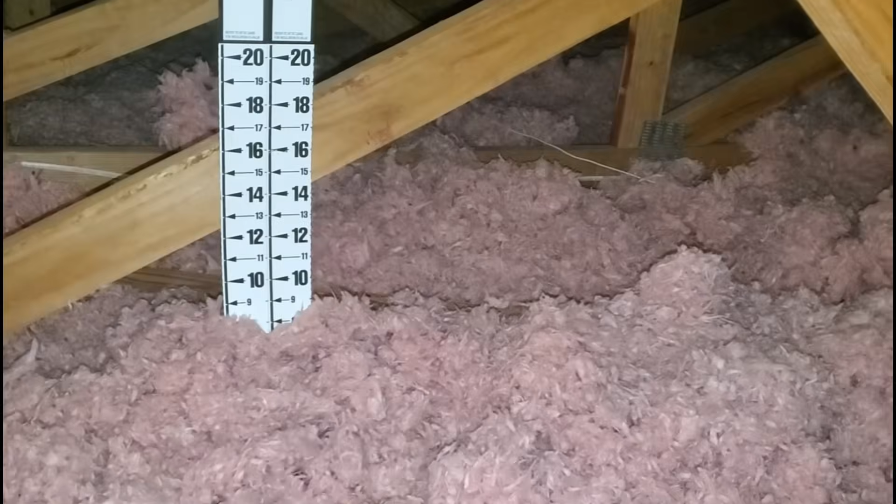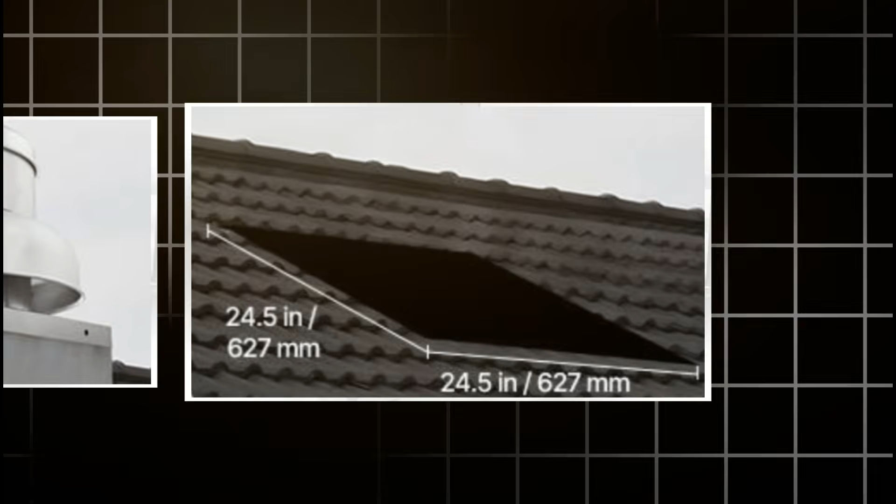Right in the middle of July, your attic is basically an oven. The temperature up there can easily hit 150 degrees Fahrenheit, slowly baking your house from the top down and forcing your AC unit to work in overdrive. The modern solution the industry wants you to believe in? Paying an electrician $500, cutting holes in your roof, and wiring up attic fans that just add to your monthly

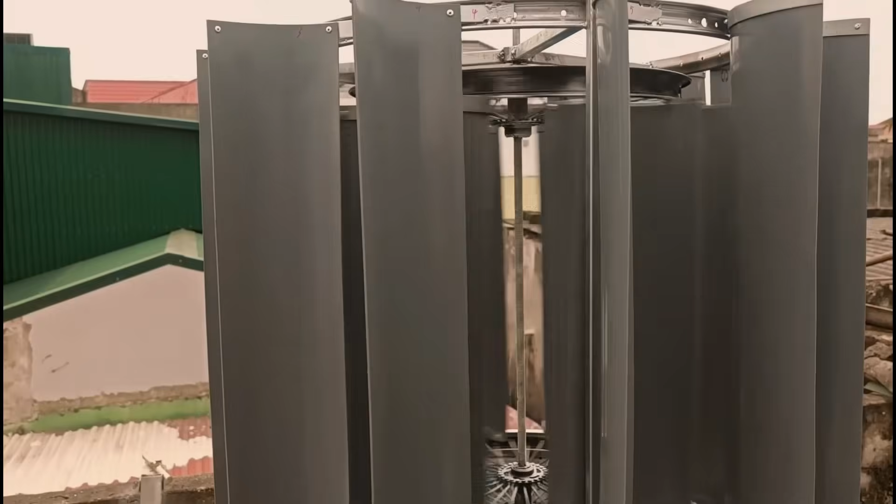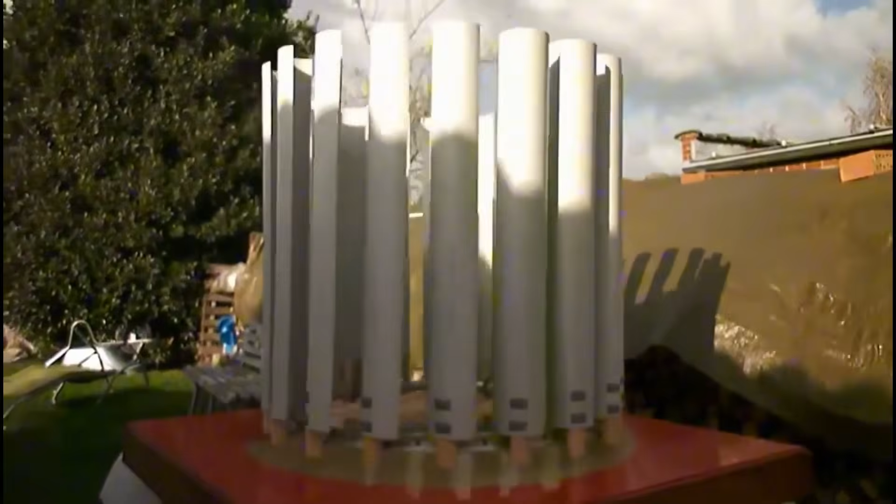power bill. But what if I told you that with $30 worth of PVC pipe and a wooden fence, you could build a vertical axis turbine system that automatically vents that trapped heat 24/7 without costing a single dime in electricity? We are talking about pure, reliable mechanics built to outlast a dozen brutal summers.

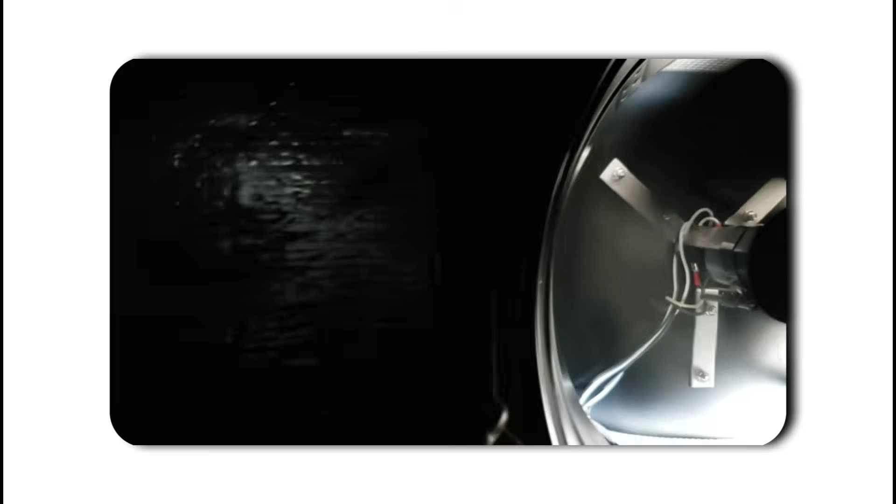So why have you never seen a kit for this on the shelves at Home Depot or Lowe's? Why is such a simple mechanical truth being completely ignored? We are going to break exactly that down in this video.

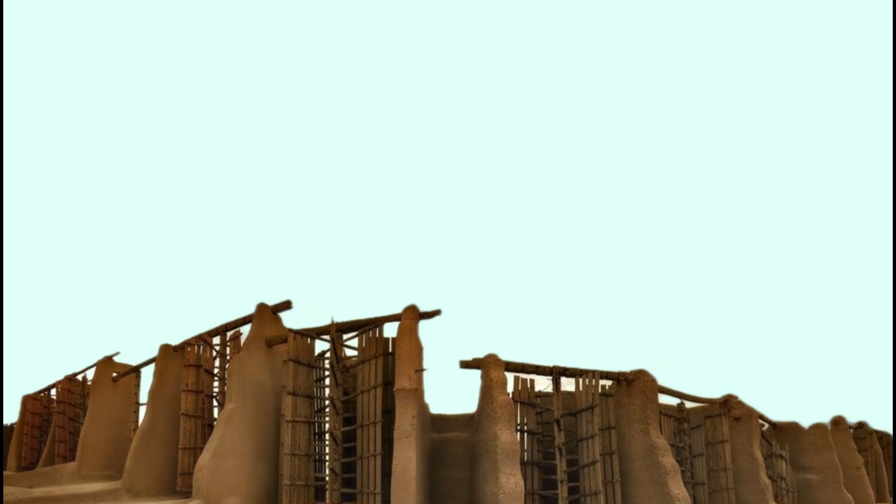Let us get one thing straight right out of the gate. The concept of a vertical axis wind turbine is not some trendy backyard project invented by a guy with a camera in his garage. If you want to see where this exact mechanical technology was born, you have to look all the way back to ancient Persia, right around the 7th to the 9th century. Back then, they built massive vertical structures known as panemones.

The engineers of that era did not have access to lightweight plastics, carbon fiber, or modern aerodynamic modeling software. They used simple drag mechanics to grind heavy grain and pump water in some of the absolute harshest desert environments on the planet. These systems were built out of mud, brick, and heavy wood. Yet, they worked relentlessly for hundreds of years before the concept of an electrical grid even existed.

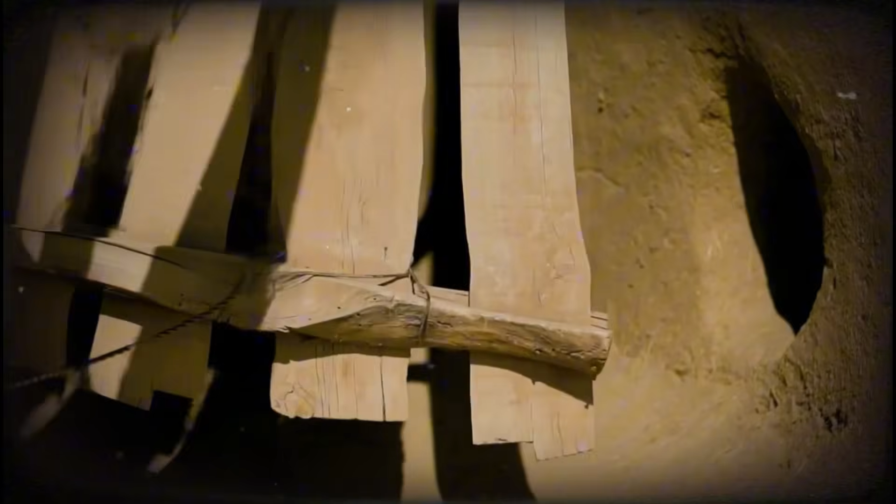The ancients understood something fundamental that we have somehow forgotten today. They knew that you do not need complex gearboxes, fragile electronics, or expensive materials to harness the wind. You just need to capture its raw physical force. That same ancient, bulletproof concept is exactly what we are going to build and mount on your backyard fence.

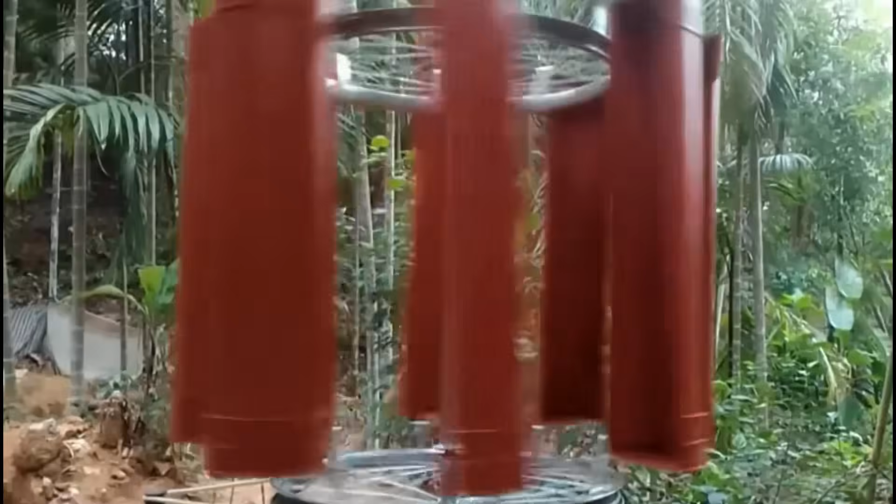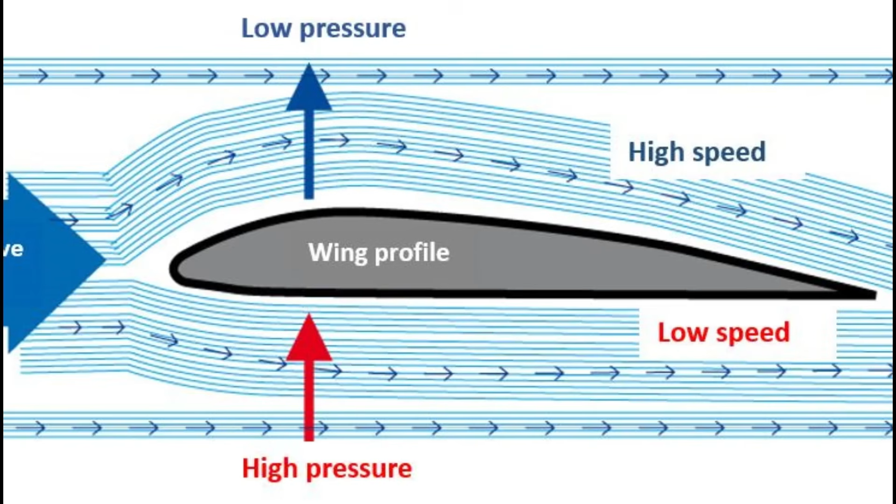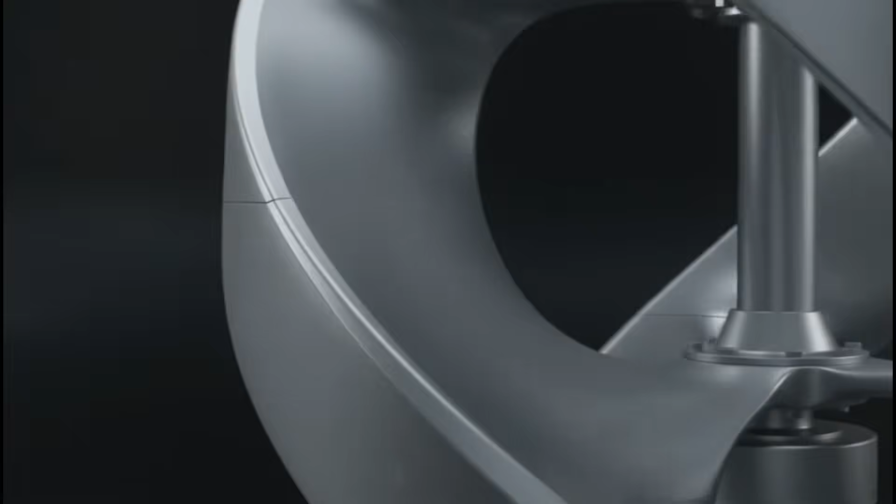So, how does this ancient machinery actually work in a modern setting? Most people are only familiar with horizontal axis wind turbines. Those are the giant pinwheels you see out on massive commercial wind farms. Those machines rely on aerodynamic lift, just like an airplane wing, which requires extremely precise engineering and very high wind speeds to operate effectively. But what we are building is called a Savonius vertical axis wind turbine. Instead of lift, it relies entirely on aerodynamic drag.

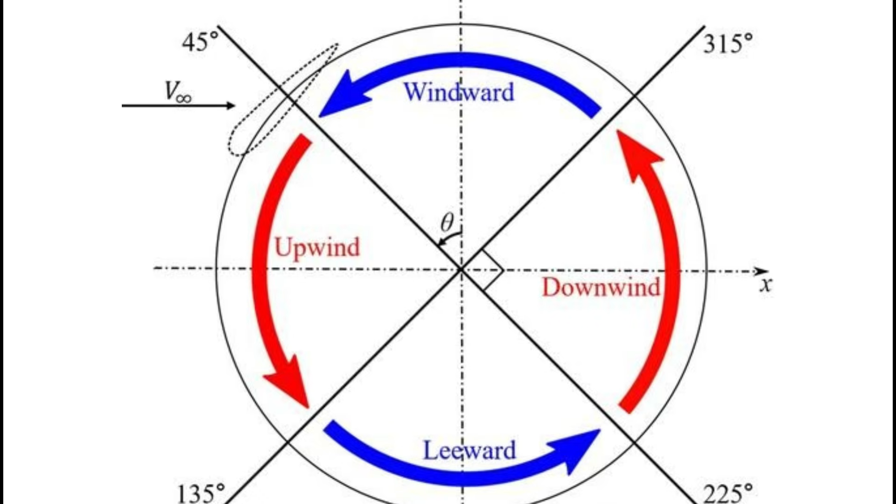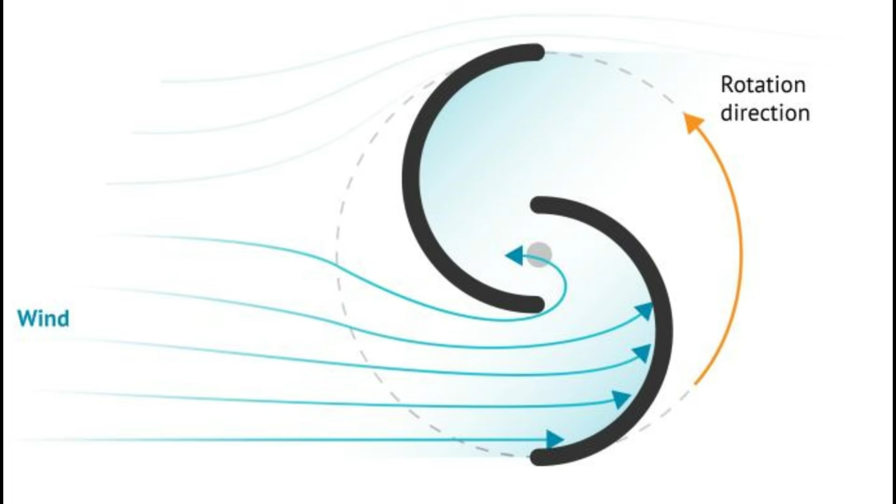Think about it like this. Imagine you are standing outside in a terrible storm holding an open umbrella. When the heavy wind catches the inside cup of the umbrella, it pushes you backward with tremendous force. But if you turn the umbrella around so the rounded top faces the wind, the air just slips right off the curve. A Savonius turbine is basically two halves of a cylinder offset from each other on a central axis. The wind pushes hard into the cupped side, while smoothly gliding past the rounded side on the return loop. This unequal pressure creates a massive amount of rotational torque.

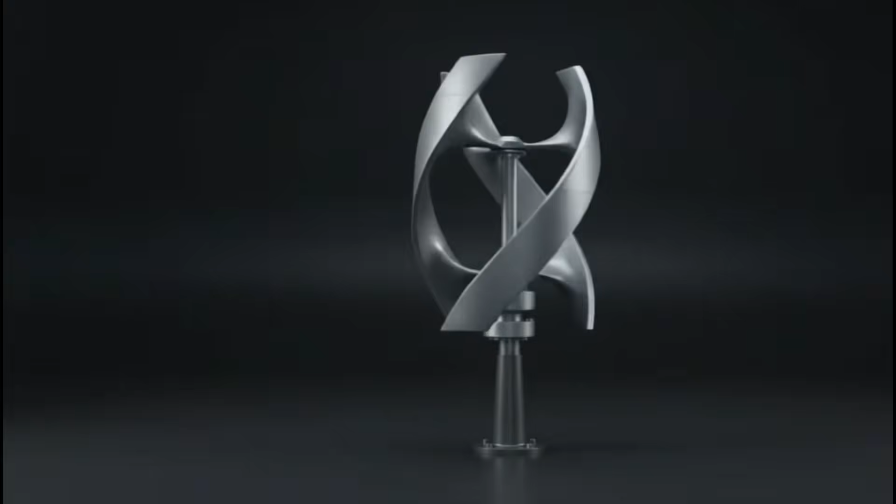The absolute best part about this specific design for a residential fence line is that it is completely omnidirectional. It does not matter if the wind is blowing from the north, south, east, or west. You do not need a tail fin or a tracking motor to find the wind direction. It just catches the breeze from any angle and immediately starts spinning.

Plus, it has an incredibly low cut-in speed. While huge commercial turbines need a heavy gust just to get moving, a Savonius turbine will start turning in a gentle, 2-mile-per-hour backyard breeze. Now, let us talk about the actual numbers, because the data here is what makes this project an absolute necessity for homeowners.

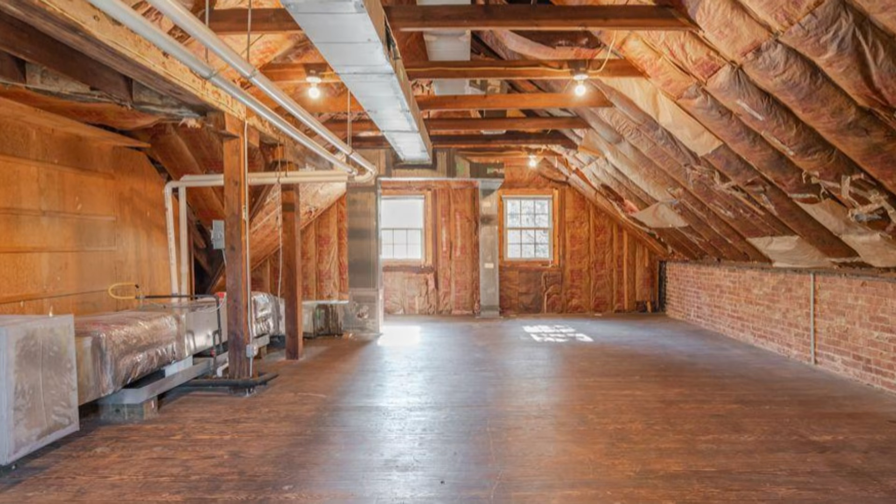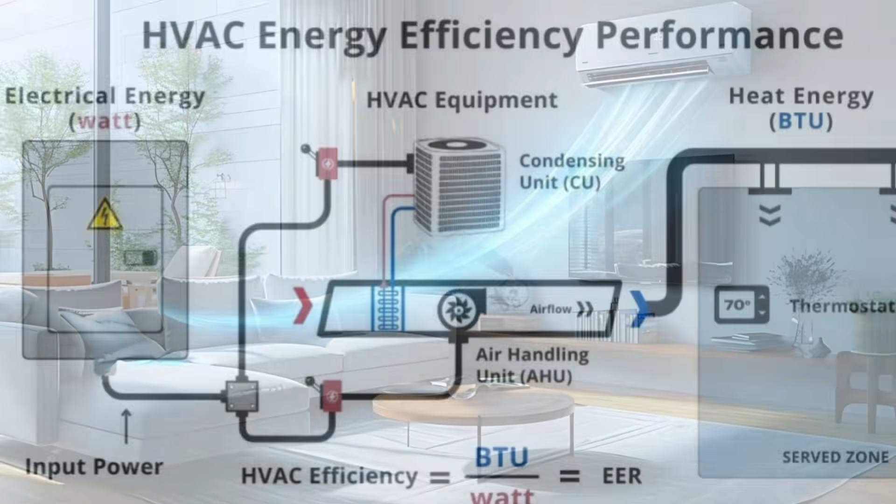According to the United States Department of Energy, an improperly vented attic in the middle of the summer can reach blistering temperatures ranging from 150 to 160 degrees Fahrenheit. That massive blanket of thermal energy does not just stay up under your roof. It slowly bleeds down through your ceiling insulation, fighting a constant battle against your air conditioning unit. This thermal leakage forces your HVAC system to work 10 to 15% harder just to maintain a comfortable 72 degrees in your living room. Over the course of a 3-month summer, that translates to hundreds of dollars wasted on utility bills.

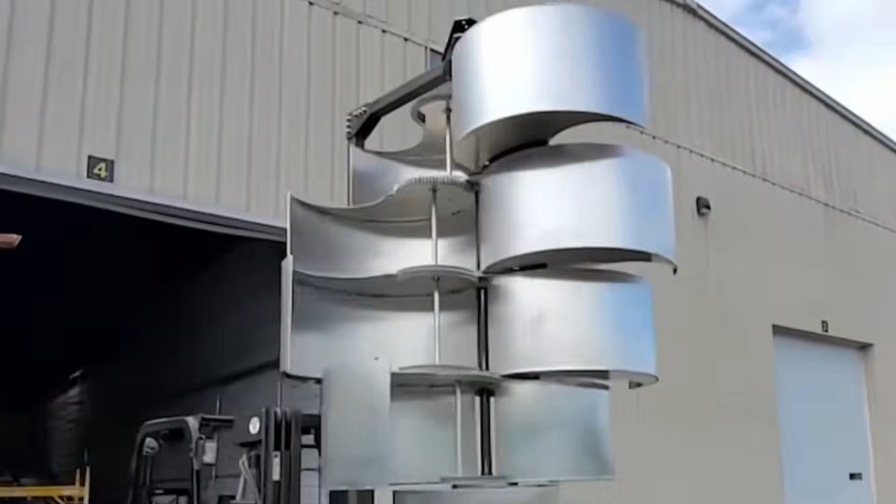Now, from a purely scientific standpoint, a drag-based Savonius turbine is not the most efficient generator of raw electricity. Due to the laws of fluid dynamics and the Betz limit, it caps out at roughly 15% efficiency in converting kinetic wind energy. But here is the secret that the industry ignores. We do not need high efficiency, we need high torque.

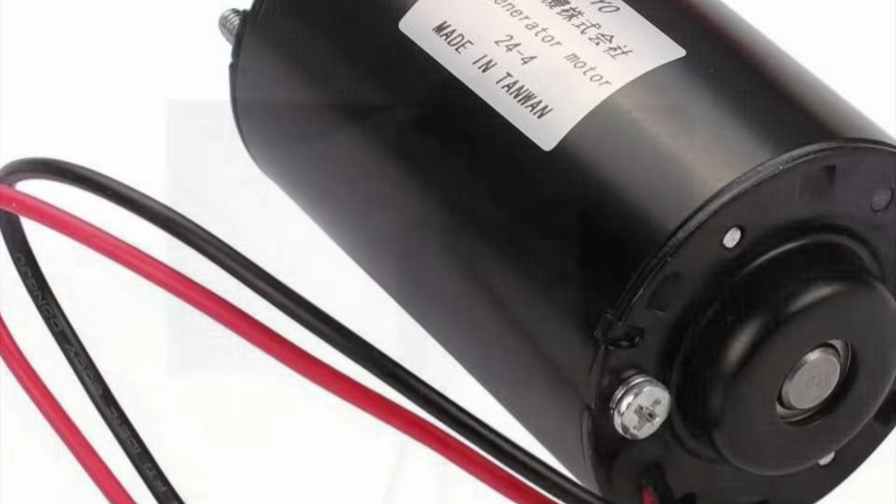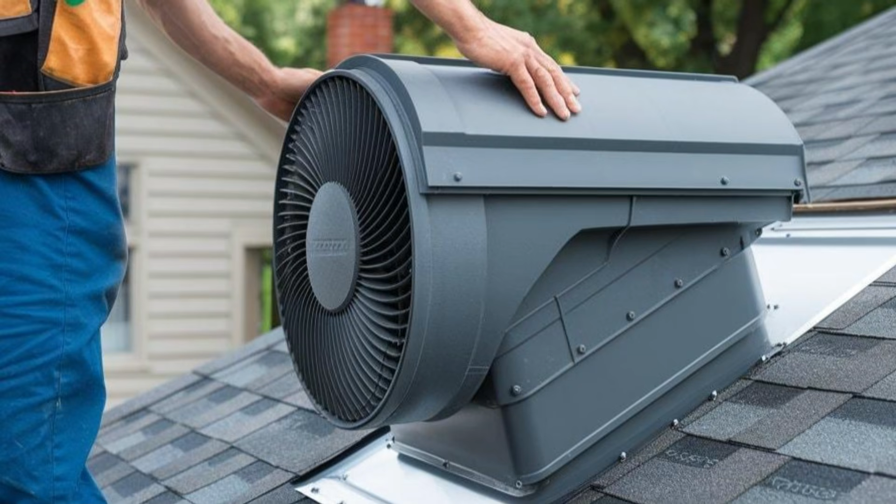Even at 15% efficiency, a simple plastic turbine creates more than enough mechanical twisting force to spin a pulley system or turn a tiny 12-volt permanent magnet motor. That little bit of rotational power is all it takes to keep a ventilation fan running continuously, pulling that trapped 150-degree air out of your attic round the clock.

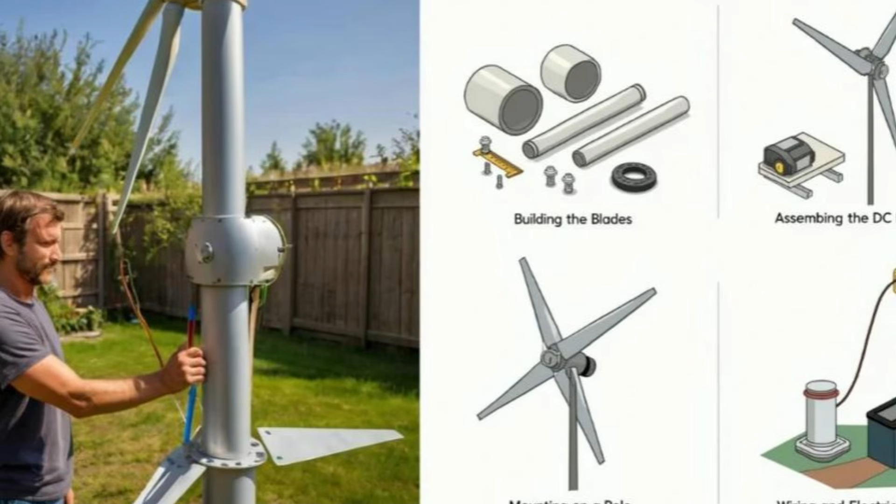This brings us to the big question. If this technology is ancient, highly effective, easy to build, and completely free to operate, why is it completely missing from modern home construction? Why is your local contractor selling you a completely different, much more expensive solution? The answer comes down to two major forces in the American housing market.

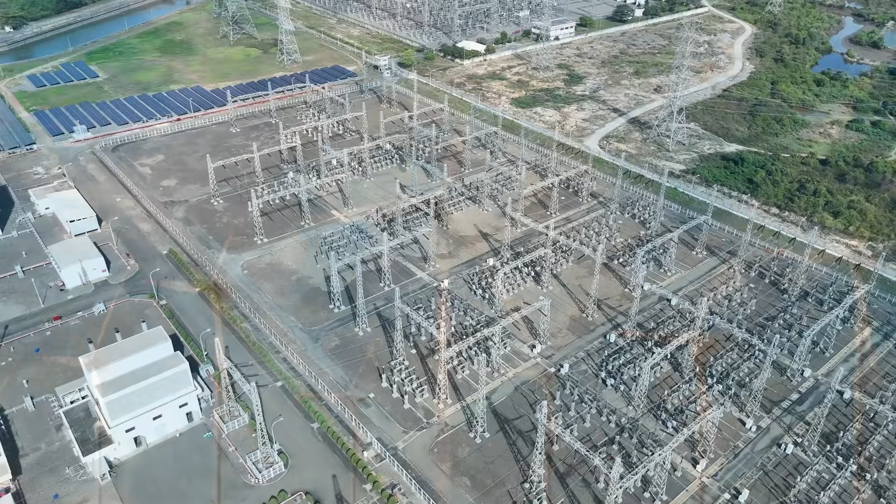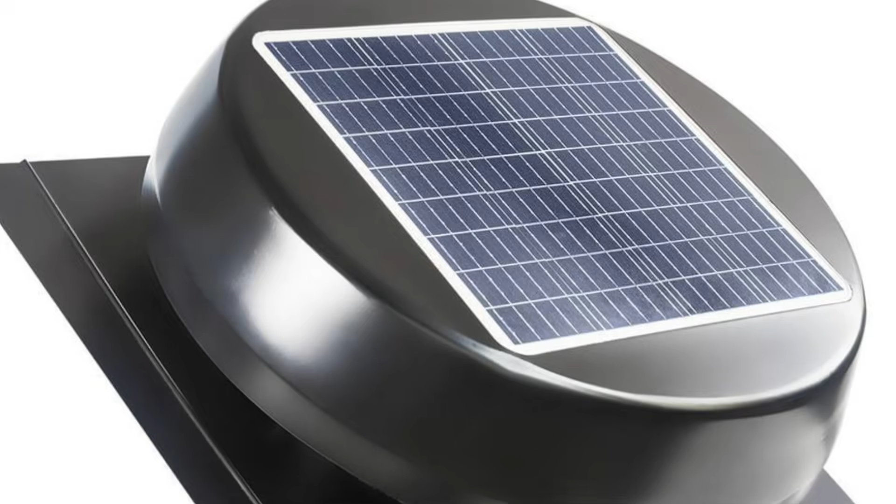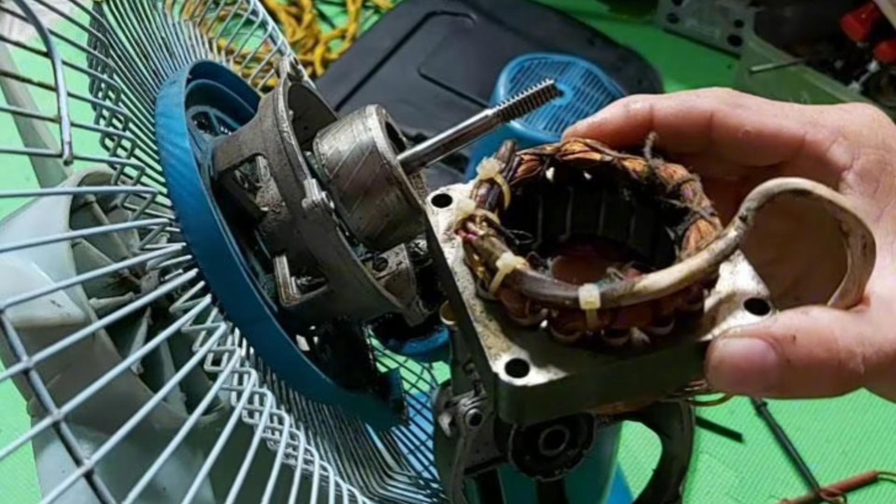First, there is the sheer profit motive of the HVAC and electrical industries. There is zero recurring revenue in free wind power. If a supply company sells you a mechanical, wind-driven exhaust system, they never see you again. Your problem is permanently solved. Instead, they push grid-tied electric fans or wildly overpriced solar vents. Those solar units usually feature cheap lithium batteries and fragile internal motors that frequently burn out after 3 to 5 years, guaranteeing that you will be back to buy a replacement unit.

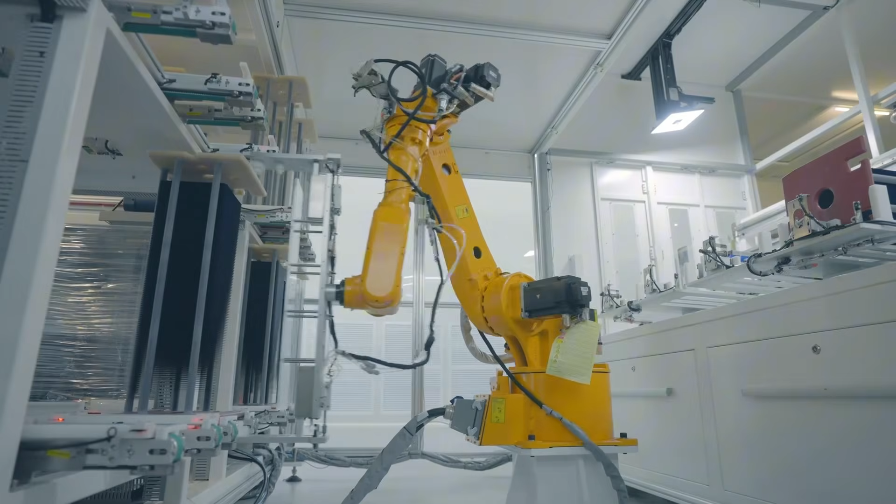The second massive roadblock is the homeowners association. The modern American suburb has been aggressively standardized to death. HOAs enforce incredibly strict cosmetic rules that demand all utilities remain totally hidden or bought from approved corporate brands. They view a spinning mechanical device on a fence line as an ugly eyesore, rather than a brilliant piece of independent engineering. The bureaucracy of modern neighborhoods would literally rather watch you pay the utility company an extra $200 every single season than let you build a functional, self-sustaining machine in your own backyard.

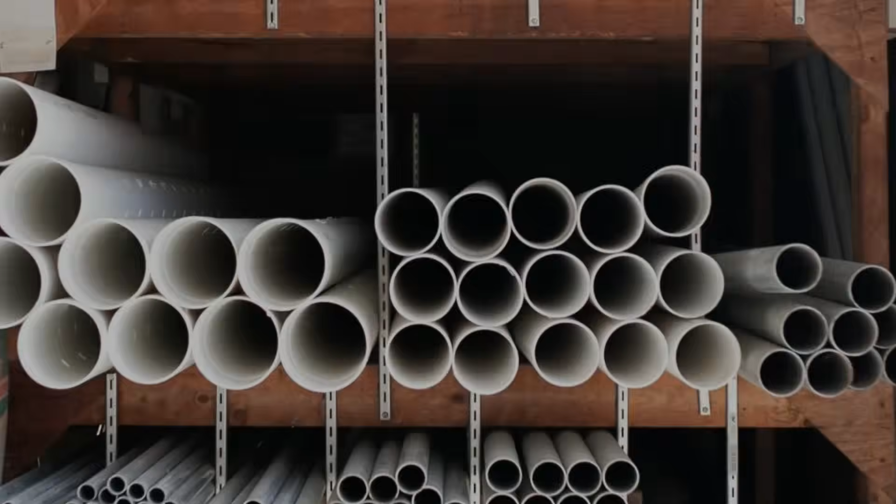But if you are ready to bypass that corporate system, building one yourself is incredibly straightforward. You do not need a machine shop, welding gear, or an engineering degree. The core blueprint is beautifully simple. You start with a standard 6-inch or 8-inch PVC pipe from your local hardware store. You cut it straight down the middle from top to bottom to create your two wind-catching scoops. You mount those two halves slightly offset onto a solid steel threaded rod.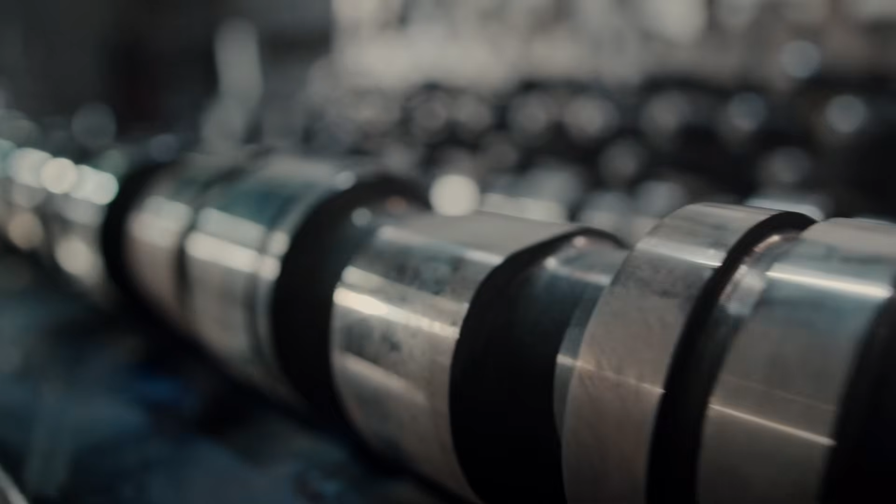To make the entire assembly spin effortlessly with zero friction, you press standard, heavy-duty skateboard bearings into the top and bottom of your mounting brackets. You attach the entire rig to a basic wooden frame and bolt it securely to the highest point of your fence, where the wind naturally funnels through your yard. From there, you have two distinct ways to connect it to your attic space.

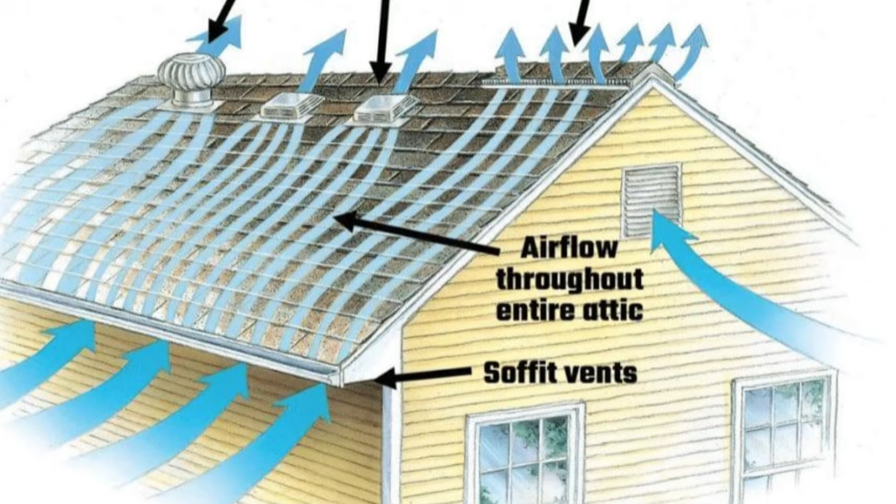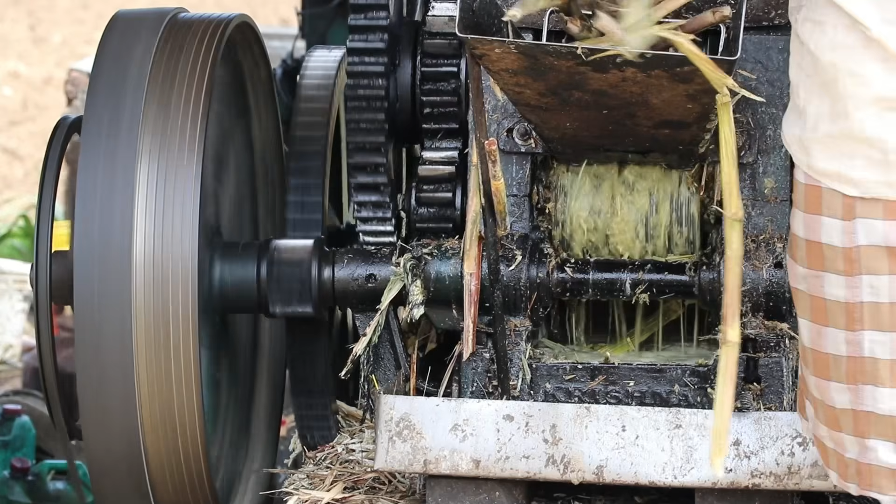The absolute off-grid method is a direct mechanical link. You use a long rubber drive belt and a simple pulley system to physically connect the spinning rod directly to an exhaust fan blade located inside your attic vent. There are no wires and absolutely no electricity involved, just pure kinetic transfer.

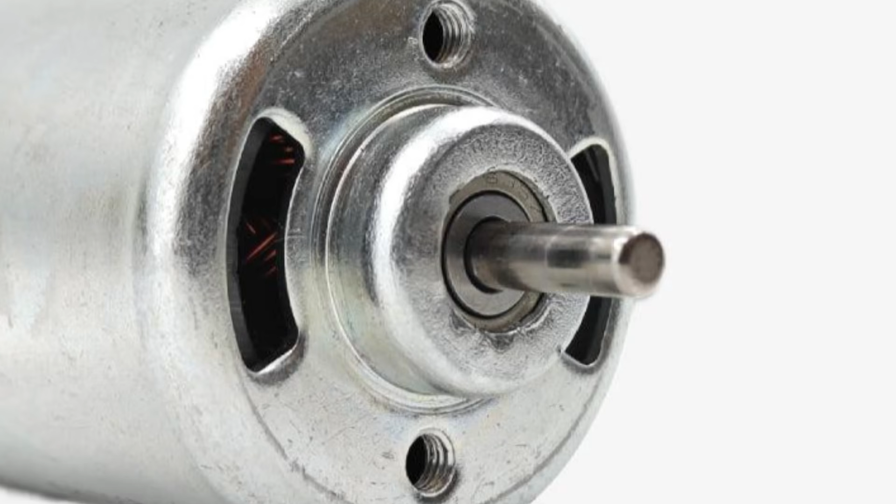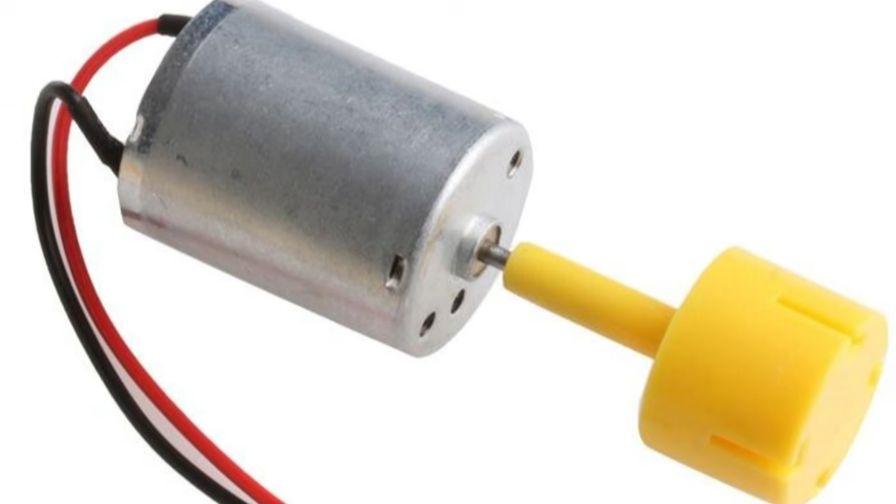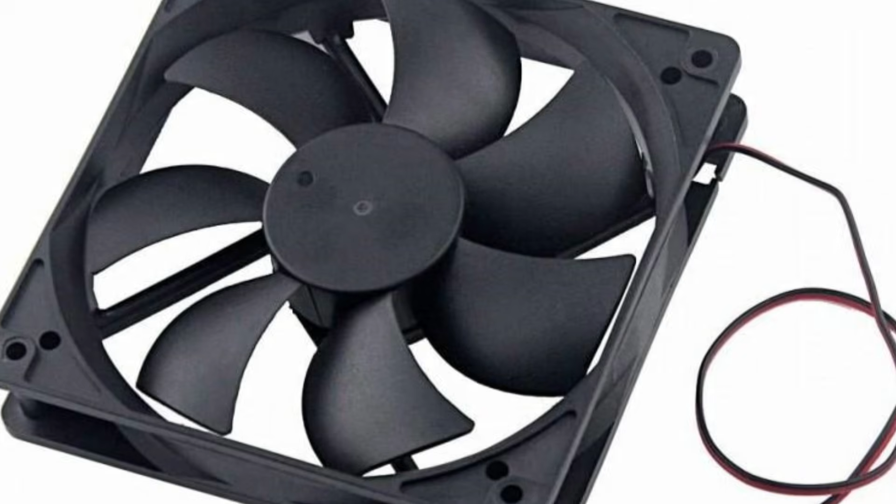The second, slightly more modern way is to attach a small permanent magnet direct current motor to the bottom of the threaded rod. As the turbine spins the motor shaft, the motor acts as a miniature generator, sending a slow, steady 12-volt trickle up a thin wire to power a standard computer cooling fan mounted inside your attic vent. Either way you choose to build it, the total cost for all the raw materials at the hardware store is going to sit comfortably under $40.

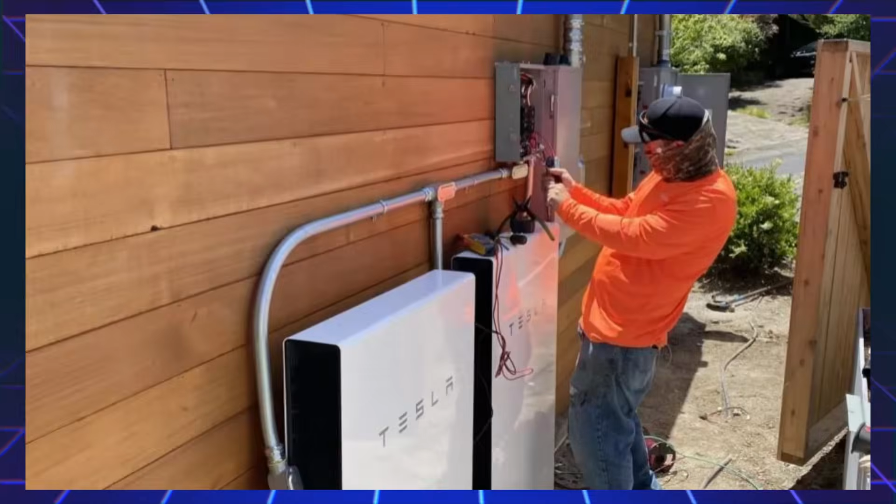The biggest takeaway here is that sometimes the absolute best technology is not the most complicated one on the market. It is the one that relies on the unbreakable laws of physics and operates totally free without a monthly subscription fee. True energy independence does not always require massive roof-mounted solar panels or incredibly expensive battery walls in your garage. Sometimes, taking back your independence just starts with a clever little mechanical project in your own backyard, using hardware store parts you bought with cash. We are currently using 21st century thinking to pay heavily for basic problems that the ancients solved for free over 1,000 years ago.